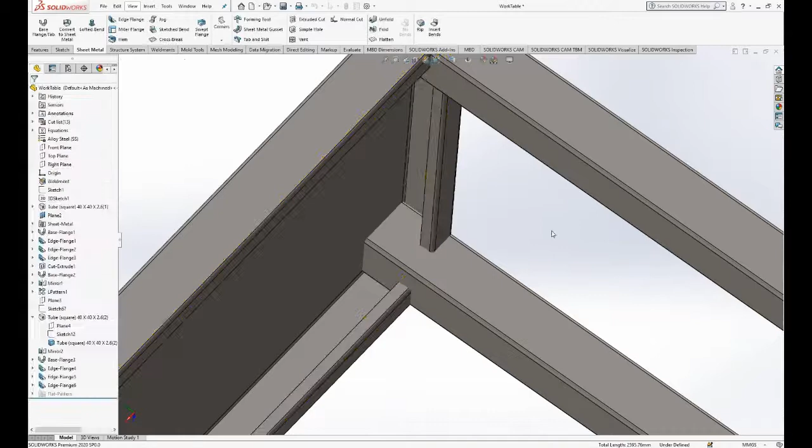If you've created a database, you can add or edit the models, and once you're ready to run the models, you can run the form, configure it, and hit the play button to finish it. Now I'm going to start out with creating and changing the database.

I'll go ahead and select it, hit next, browse to the directory you want to go to, and I'm just going to type in the file name.

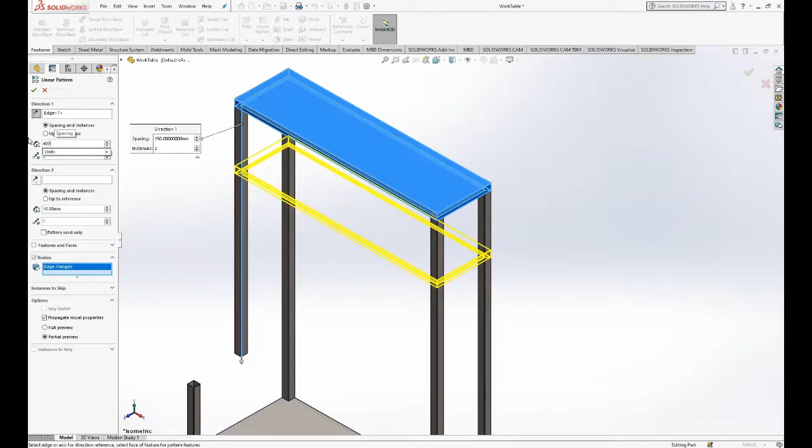That's pretty much it. It's telling me now which database I'm using, so now I'm ready to add the models. I'll go ahead and hit next. I'm going to use the current open model, so I'll hit next.

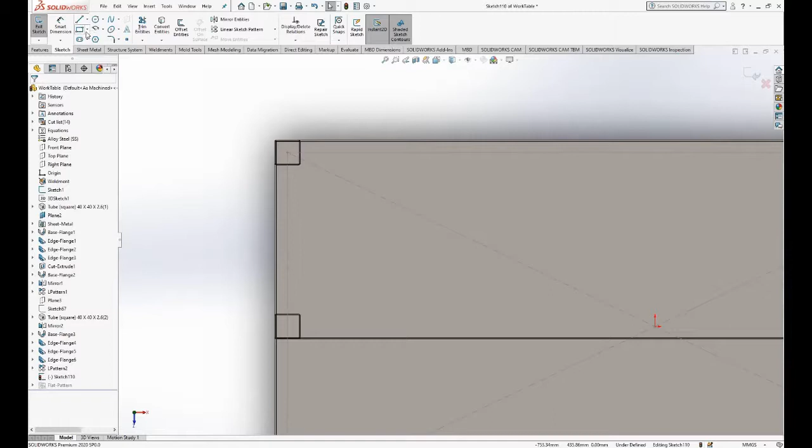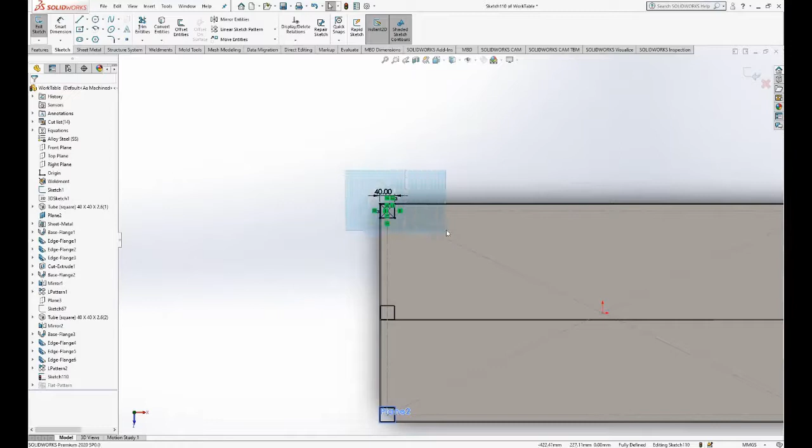I'm going to go ahead and add in here beam length, and go ahead and hit add. That adds it to a dimension that can be driven by DriveWorks.

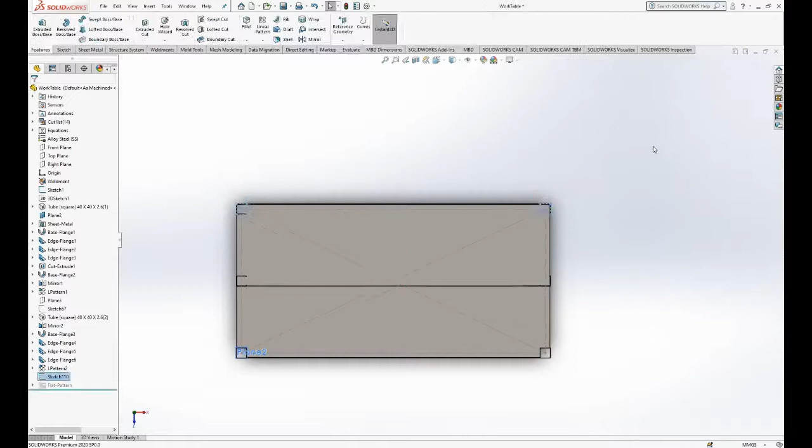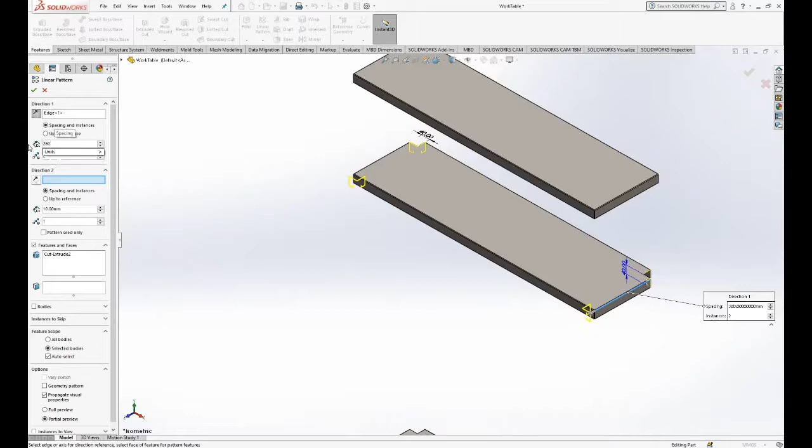You can rename it to make it a little bit easier if you haven't renamed it already in the SolidWorks feature. That looks pretty good. We'll go ahead and close out of this model.

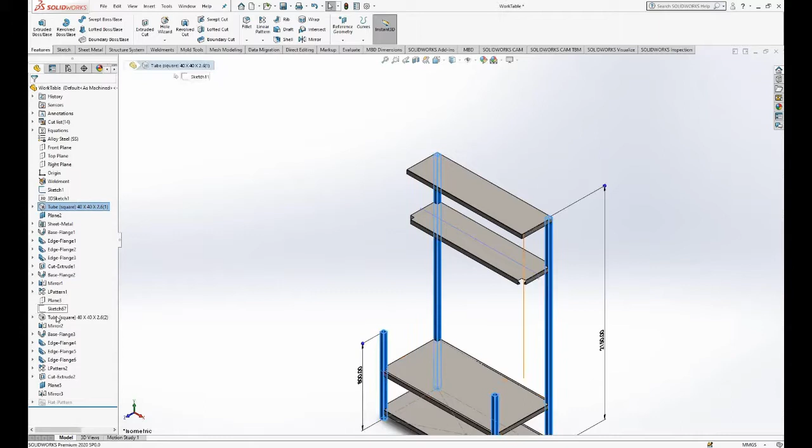We're back into the assembly. I'm going to go back to edit, add. I'll go ahead and double click on the mobile gantry, and I'm going to go click on some custom properties.

So I may be wanting to change the project number and the safe working load. I'm going to go ahead and add those to my configurations.

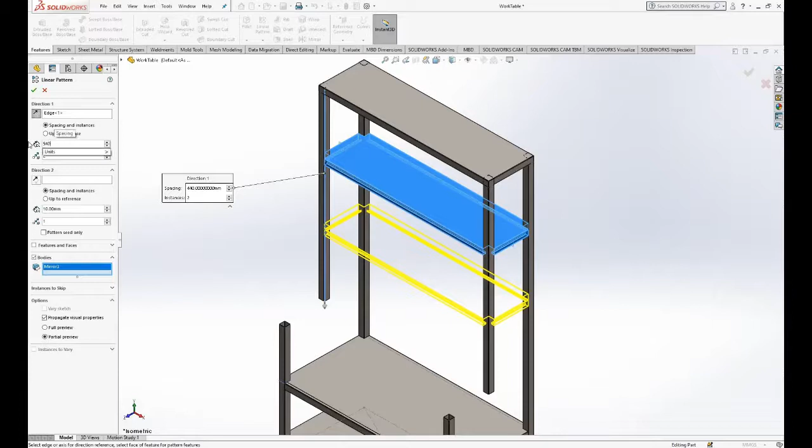Now in DriveWorks, the assembly actually drives the drawing. So if I go to the drawings and configurations, I can go ahead and browse for one that's already out there. I'm going to select the mobile gantry drawing file, go ahead and hit open.

Then I'm going to go back to captured models, double click on the mobile gantry, the captured models, and I'm going to go to the universal beam. I'll double click on that. You can see it now automatically opens that.

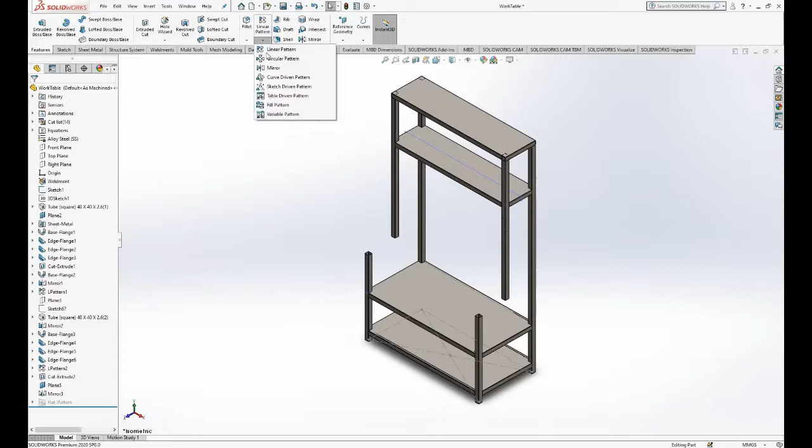I'm going to go down to its drawings and configurations. I'm going to go ahead and check the option to switch configurations by a rule. And from that, I'm going to go ahead and go into my form designer. I'll go ahead and close out of this, get back into my assembly.

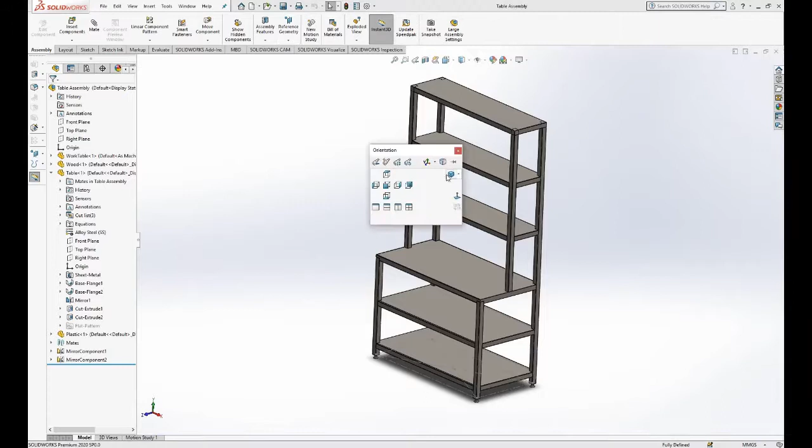So the first thing I'm going to ask is for a project number. Now we've got a checkbox that the project number is required, so then we'll go ahead and say next. And that variable is now added.

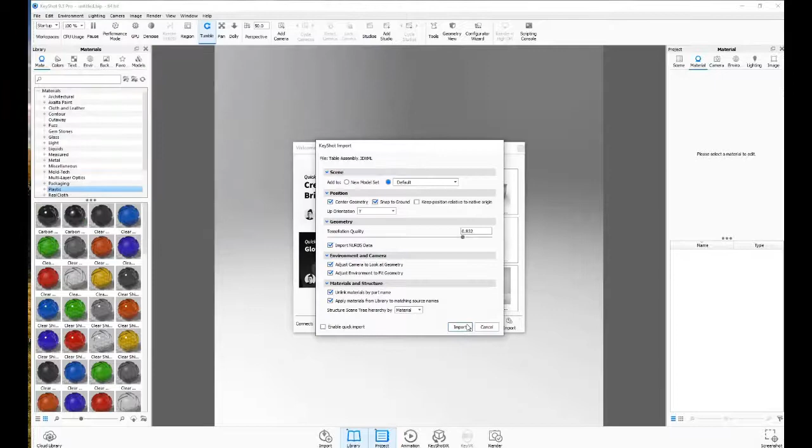To the form, I'm going to go ahead and add. I'm going to create another one. For this one, I'm going to call it safe working load. For the type, I'm going to say a drop down. It is required. And then my options for the drop down, I'm going to type these in. So I have 500 kilogram, 1000 kilogram, and make sure you put enter after each of these. And one more, we'll do 1500 kilograms. We'll hit next, and that adds it.

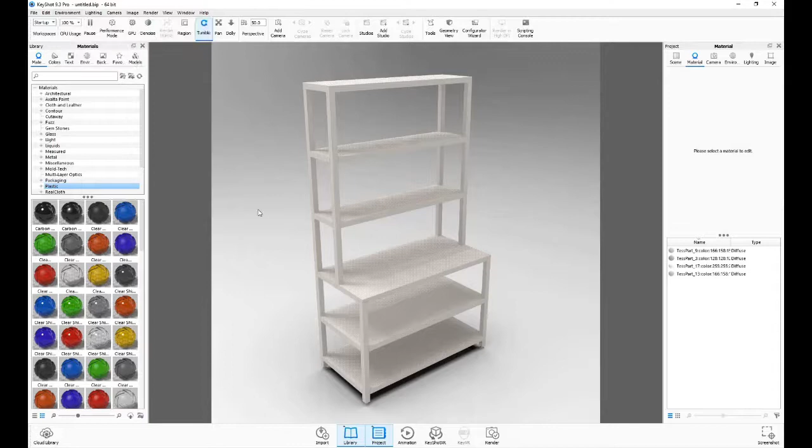So we need to add another one. This one is going to be the opening height. This one I'm going to get a little fancy. I'm going to say it's a spin button. So this gives me a minimum value of 1500 and a maximum value of 2500, and then I can tell it what the incremental value is. So I'm going to do 50. So we'll go ahead and say next.

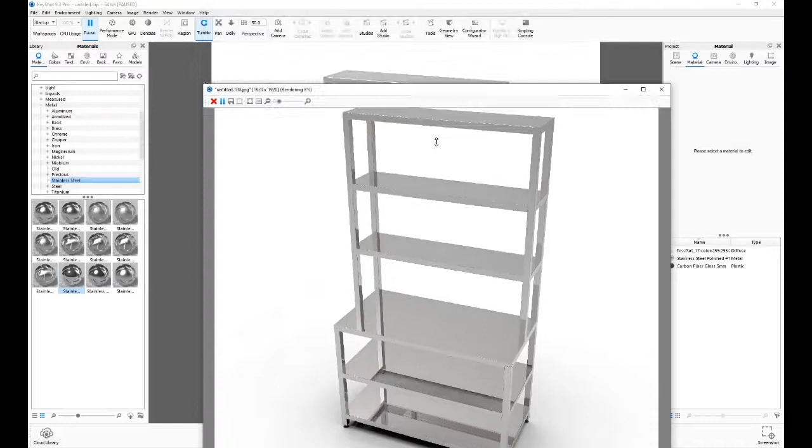We'll go ahead and add one more. This is going to be the opening width. This one I'm going to do as a numeric text box, which can go from 1500 to 4000. And we'll go next. So you can think of these as the parameters that you're going to drive on your form. And then with these parameters, I'm going to create some rules that actually drive the dimensions and the features and stuff. So I'm going to go ahead and go into the rules.

So in this kind of list, I have 3 different file names. I have the leg, which is the exact same file name, a universal beam, and then the actual assembly itself. So I'm going to go ahead and edit that one first. Go ahead and just select that and hit next. So in the list, I'm going to double click on mobile gantry here.

And for the inputs, it's got a little drop down. I'm going to select on the project number. And I'll go ahead and click OK. Next, I create a rule for the universal beam, so I'll double click on that.

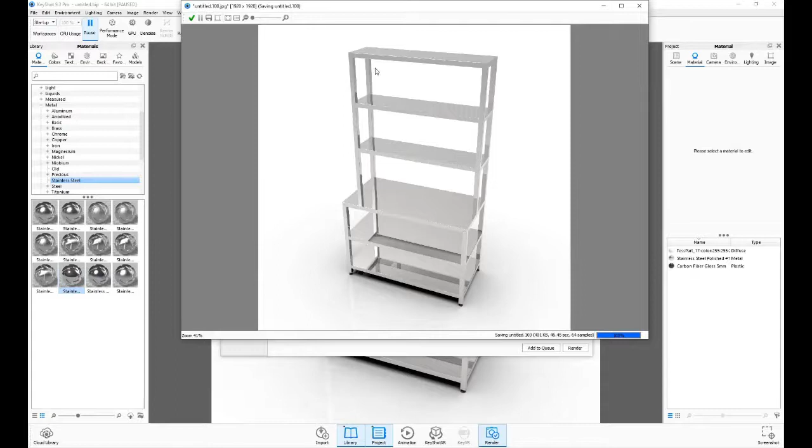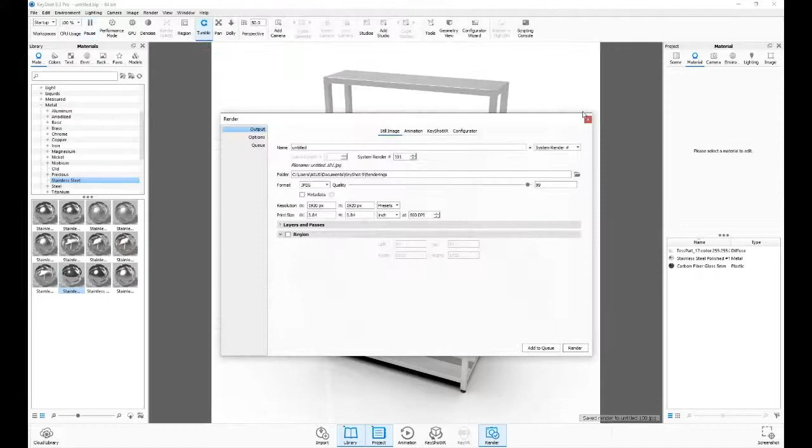For the inputs, I'm going to go ahead and get project number. Now for this file name, I'm going to do the project number. I'm going to go ahead and type this up, and I'm going to put in quotes, space in quotes. So it's got the project number and then a space. Then I want to grab the inputs for opening width. So that's going to automatically put the number in there for the width. And then I'm going to add some more text. So I'm going to say it's that. I'm going to put a space there and say wide.

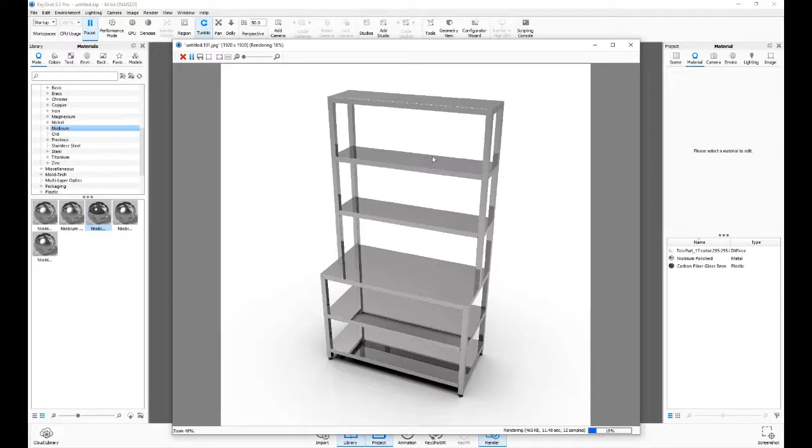And then inputs, safe working load. And then finish it with and space, safe working load. So for an example, if the project number is project number 1, it's going to say 1, then it'll have a space. If the opening width is 1600, it'll say 1600 wide, and then it'll say what the working load is. So say for instance it's 1500 kilogram safe working load, and that'll be the actual file name for this part. So I'll go ahead and say OK.

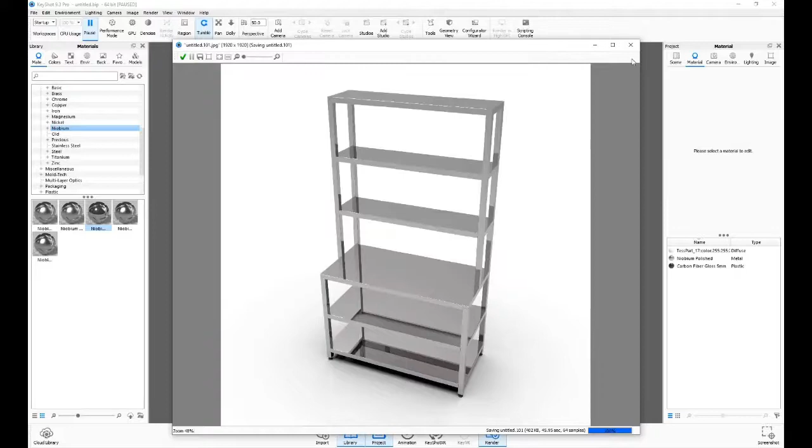And the last but not least, the leg. Go ahead and double click on that. This one I also want to get to the project number and the opening height, and then I'm going to add some text after it. So I'm going to put and space HIGH and hit OK.

Next I'm going to go ahead and preview this real quick. So on the configurations, I'm just going to kind of walk this down. So I'm going to uncheck the edit. I'm done with the file names. Check on the configurations. Then I'll hit next.

So on the configuration, we'll just double click on the universal beam. And for the inputs here, I'm going to set this to safe working load and go ahead and hit OK. And we'll do it again.

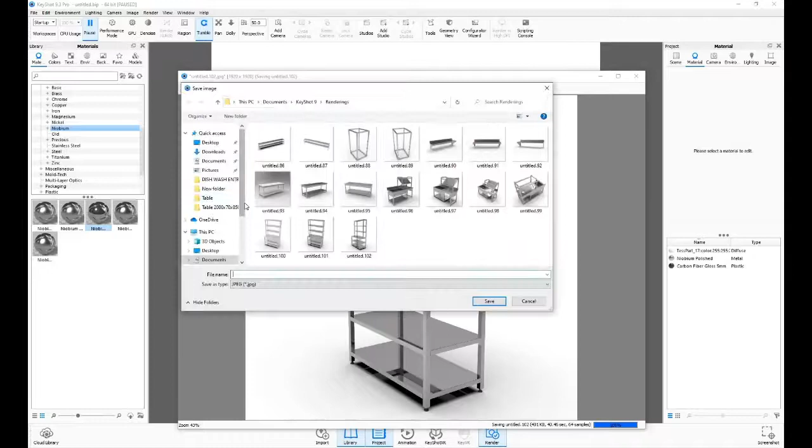We'll go back, check, uncheck, go into custom properties. We'll start off with the project and just double click that. And of course the project, we're linking it to the project number. So we'll go ahead and say OK. Safe working load, double click on that. Input, safe working load, and hit OK. So then I'll go back to previous.

And now for the fun part of setting up some of the dimensions. So we'll select on that, hit next. And we'll start off with leg height. Again, just double click. For the inputs, we'll just say opening height. So when I change the opening height variable...